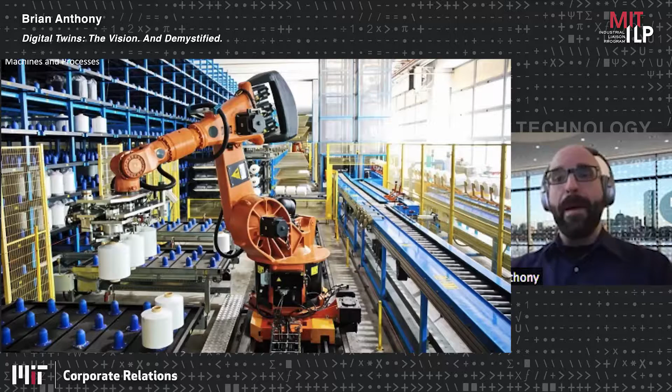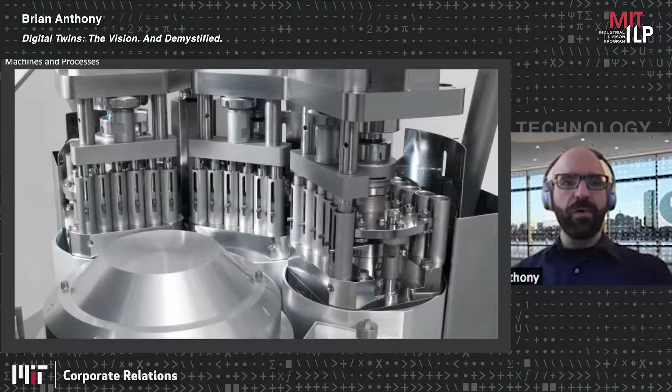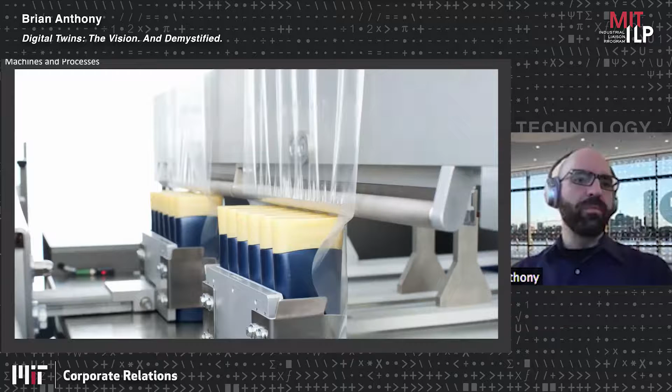It could be more complex, it could be a machine or a process. So a digital twin could be something that we want to emulate and mimic, be a twin of our product or our process, our machine, here a robot, or a coffee roasting machine, or a stitching machine for sewing together, putting the tag on a tea bag, or for compacting of pills for a pharmaceutical blister pack, or then packaging of those pills, or wrapping the deodorants or water in the plastic film before it's shipped, or filling of bottles, or extruding of fiber, knitting fiber together, or sewing fiber.

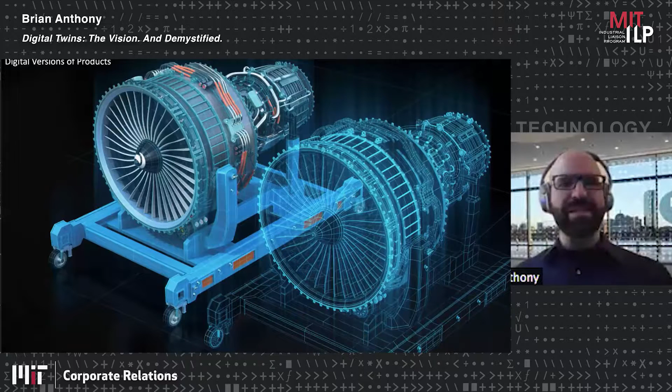Now, if you Google digital twin, you'll find a large number of phenomenal images that try to give this perspective of what a twin is. And you may find things that look like turbines and jet engines, the digital version of the product, where on one side you have the real product, and the other side you have this matrix-like graphical representation. You'll see that for turbines, or automobiles, or aircraft, wind turbines, or inside the factory, machines and processes.

So that was a rapid fire. Here are all these things that are physical that we could think about having a twin for.

Now, my first poll, just to get the audience participation going. I'm interested, from your perspective, you're interested in digital twins of what? Of products, of processes, of machines, sensors, control systems, production lines, factory, supply chains. Pick as many as you would like.

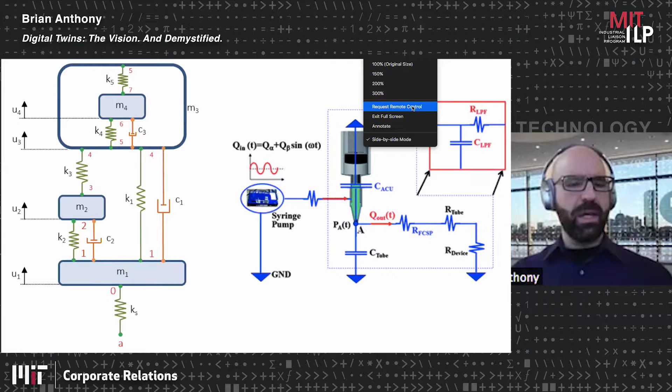Maybe back in your engineering or undergraduate days, you remember developing free body diagrams, and lumped parameter modeling is a digital twin. I have masses, springs, and dampers, and I can connect them together to develop an equation that describes how these things relate. Or I can look at a fluid system and develop a lumped parameter model that has resistance of flow through a pipe and capacitance of fluid being stored in the pipe. So these are digital twins, the modeling tools you use to develop a physics-based, white box model of some process.

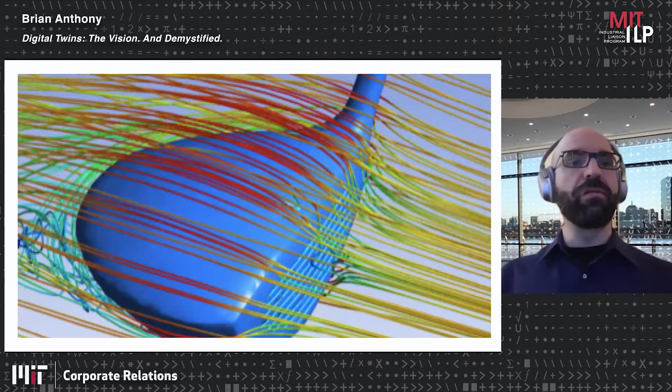If we increase the complexity a bit, we can use a tool like finite element models, which are really just a bunch of small springs and masses together to simulate where stresses and strains are happening in a complex product. Or, adding an additional level of complexity, computational fluid dynamics that models airflow around the head of a golf club, or fluid flow inside the mixing of a complex chemical reaction. Those are physics-based, definitely pointing to the white box digital twin model.

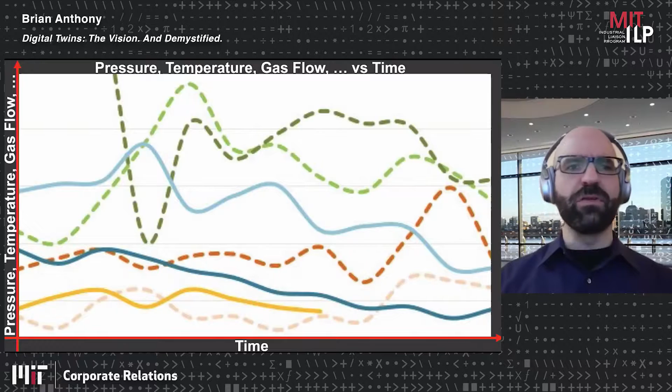When we talk about data, there's production data, time series data versus pressure, temperature, gas flow versus time, or velocity and forces versus time, or run charts where we have a process roughly in statistical process control, and we're seeing how it's deviating with respect to the mean.

Data also includes event logs or maintenance logs, when equipment is down and when equipment is up. Data also includes sensors, cameras, the ability to get thermal imagery of molten steel or molten aluminum, or optical imagery of circuit boards or food products.

So let's test your knowledge so far, or start at the high level. Let's start at the factory. How do we develop a digital twin of the factory? I may call a company and say, hey, I need help making a digital twin.

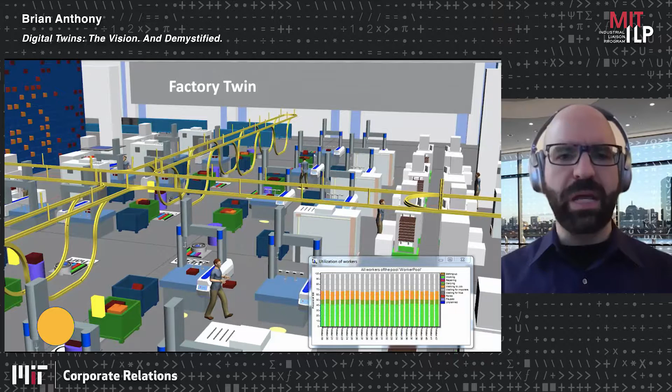And I want this graphical representation of my factory, and I want to be able to simulate what's going on. If I peel back the beautiful graphics of this tool, and we'll see some commercial examples here in a moment, what is a factory simulator? The building block, at least at some level that we'll talk about, is an unreliable machine.

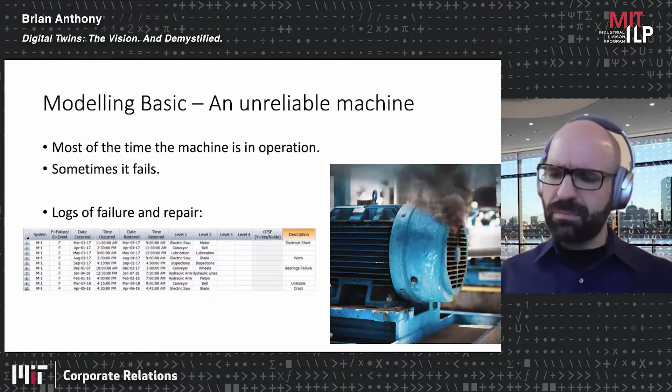Every machine, your car, a turbine, a generator, is going to operate for some period of time. It will fail at some point. And we will model this unreliable machine with nothing more than a coin flip. Actually, two coins. We're going to model this machine that sometimes goes down by saying, most of the time it's up, it's up, it's up. So I want to flip a biased coin that for most of the time stays heads. But once in a while, it's going to fail.

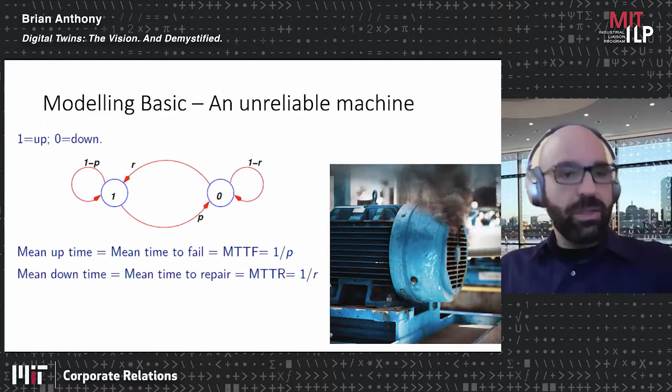And a way that I represent this is this thing called a Markov model, Markov chain when we sequence it together. My machine in this case, and I have many machines in my factory, can be modeled as two states. It can be up or it can be down. And it has some probability of staying up and some probability of going down. And then once it's down, there's going to be a time and a duration associated with repairing it to get it back into its good state.

Now we can model that. The digital twin, the underpinning to that, is this coin. Take a coin out of your pocket, has to be something other than a Bitcoin, bend it, meaning bias it, so that when you flip it a bunch of times, it has the same failure rate as what you observed from your factory floor, where I have this machine that if I look at many instances of time over days and months and years, sometimes it goes down. Let's bias the coin so that I could just flip it, and once in a rare moon, the coin is going to fail. It's going to come up tails. And I'll have a different coin for how long, the rate with which that machine can be repaired.

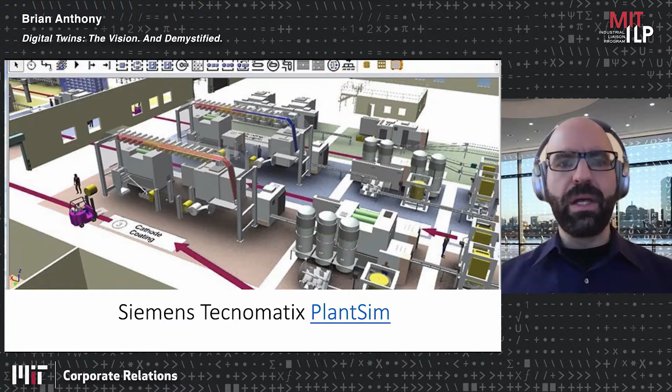Now, all I'm going to do in looking at these various commercial tools is I'm going to simulate my factory by flipping that coin, or bunches of coins, for every machine. And I'm going to keep track when a machine is up. If it's up and operable, material can flow through it. So I'll let material go through. And then I put a glossy, beautiful graphical display on top of it. And I get products called like FlexSim or Factory IO or Siemens Tecnomatix. But that's the graphical layer on top of just this fundamental ability to flip coins.

And what we can do with that coin flipping is we can model a simple production line that has two machines and a buffer between, model each machine with coin flips, keep track of when your coins are up or coins are down, when things are operating, material is flowing through, and I have real production at that instance in time. If one machine is down, I may get an increase in the buffer size between.

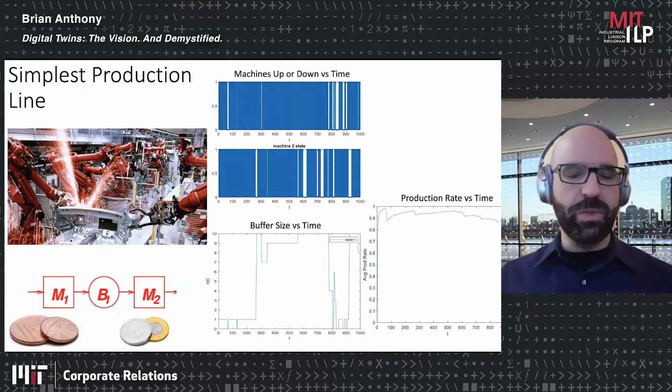And it doesn't just stop with one or two machines. I can do this for many machines. I can use this factory simulation notion to figure out different reconfigurations of a factory and what are the impacts of different buffer sizes, or how big should my buffer be.

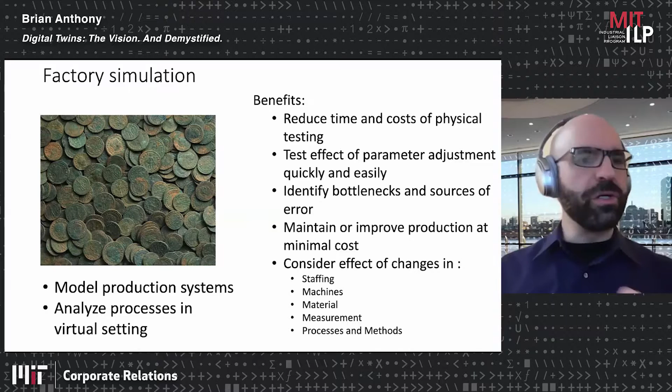So a factory simulator in this way, it can model production systems, provides this ability to predict what's going to happen with a new layout, consider changes to staffing, to machines, to materials, but building on top of this notion of a biased coin.

So in this way, my next question: factory simulation, what type of model is it? Is it a black box model, a gray box model, or a white box model? Are we building on underlying physics? Or do we know nothing about the process? Or is it someplace in between?

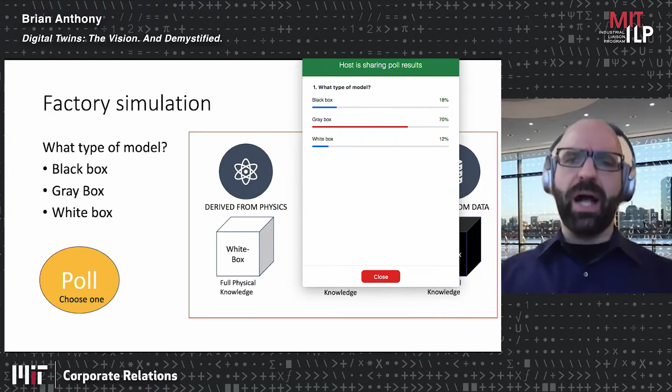Okay, so if we can pull up. So gray box. Very few people voted for black box, very few for white box, gray box. I agree. So why is it a gray box and not a black box or a white box?

So white box, we're not building on fundamental underlying physics, but we are building on the fundamental principle of variability and variation and randomness. So we know there's randomness, we're abstracting away. We capture some aspects of physics, of some real underlying process, meaning randomness. And we simulate, we run, we flip all these different coins, and we bias those coins based on the data that we have for real machines and real equipment that allow us to perform what-if examples and what-if case studies.

So let's switch paths for just a little bit. That was at the factory scale. Let's use fiber production through a number of different case studies of digital twinning for both materials processing and fiber extrusion.

So the digital twins that we're going to consider are going to allow us to look at some very novel ways to make fiber. That fiber can be fiber that we're putting into our apparel, or fiber that we're embedding into composites. What we're going to consider are optical fibers that are extruding through a draw tower of the type you'd find for optical fiber production, or polymer fibers.

And we want to do two things, as we'll see. We want to control the diameter of the fiber, but we don't want to just have a uniform diameter. We want to potentially modulate the fiber, and that gives some interesting properties both optically and physically. And then we also want to embed things, filler materials, inside of the fiber.

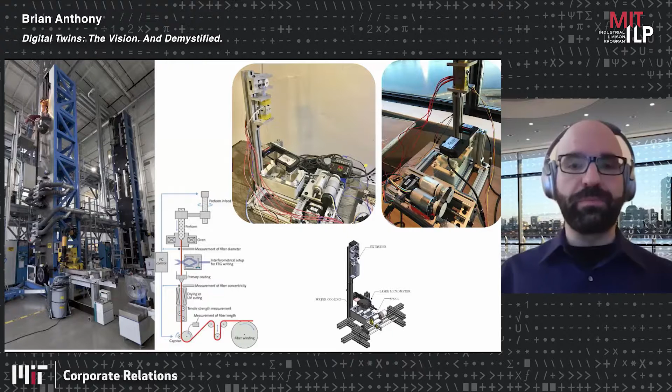The machines we're talking about are everything from a large draw tower, this is a three-story optical fiber draw tower, to a tabletop polymer extrusion system. In both of these cases, what we want to do is control the dimension of the product. For an optical fiber, we want it to be uniform and continuous. For some of the novel apparel fibers, we want to modulate the fiber diameter.

And the reason that's interesting is if we have a polymer fiber that we use to then knit or weave our clothing, and we have these sort of nodules along the length, when we knit or weave them, the fiber, with respect to fibers that cross it, will still roll as it always has, but it won't slide. The knobs on the modulation will stick, so you can induce very interesting properties in materials made out of modulated fibers. But we also want to embed technology into the fiber, to organize materials that have optical properties, electrical properties, or strength-bearing properties.

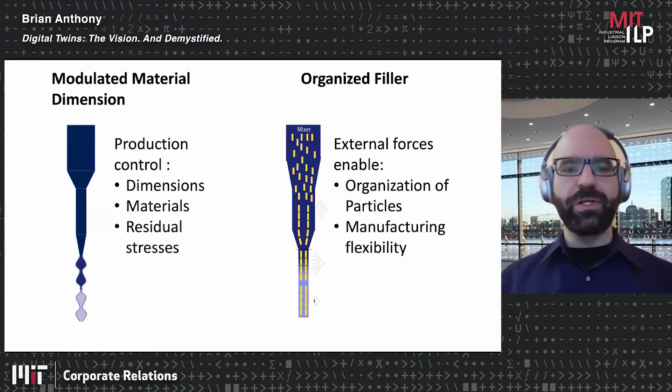Now, the system we'll start with is this little tabletop fiber extrusion system. It sits about half a meter high. It looks just like an optical fiber system. It has a heating chamber to melt the polymer, a cooling tank, and a spooling motor to pull it all through.

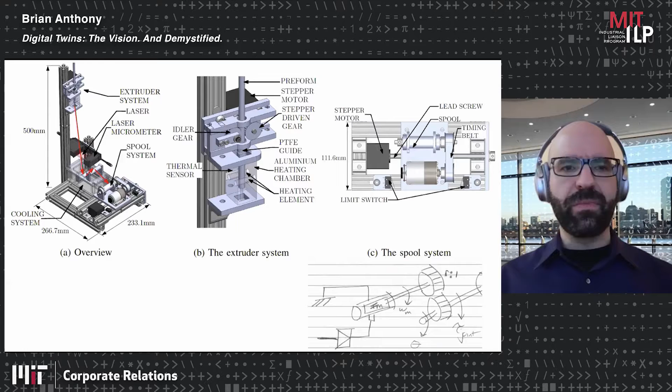Now we could start with developing a digital twin for this. We could write down the equations of motion for all the various components, and develop a set of differential equations that we could then simulate in time to predict how this machine is going to respond.

If I want to change the set point from a fiber diameter of 100 microns to 200 microns, I may get some overshoot, and that can be modeled by this differential equation through a physics-based analysis and lumped parameter modeling. If I do that, I can already reveal the fact that this fiber extrusion system is not symmetric. It's easier to go from a thick diameter to a thin diameter because I can suddenly pull faster, and it takes more time to go from a thin diameter up to a thick diameter. So we have different properties, and that's relatively easy to model.

But that's a white box model. What are the problems with the model? From your perspective, is it only captures the simple physics? It doesn't account for the part where we have to redo for different set points. It misses random variation. Or, hey, there's nothing wrong with the model, it's perfect, it'll work.

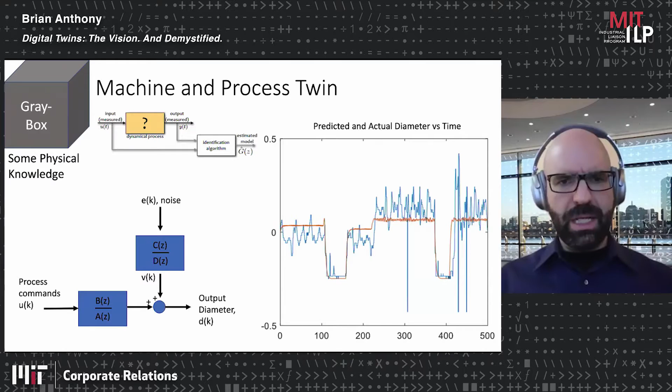Now let's continue to talk about the fiber for a moment, but in a slightly different context. So these next several slides are taking that concept of model fitting and amping it up a little bit, where maybe I don't have historical production data where I can just collect all the data, stop, analyze it, and develop the model. Maybe my system is continuously varying.

I want to simultaneously take the inputs and outputs I'm getting from my system, but to add a level of complexity, I can also control what I want my machine to do. If I'm trying to develop a model that says here's the inputs, here's the outputs, what's the best thing that allows those to be predicted from one another? If I also have a lever to reach into the system, I'm going to use my least squares techniques on steroids, but also do real-time experiments. I'm going to look at the uncertainty associated with how well my model is predicting what I'm measuring, getting this data in real time.

And I can change my system. I can say let's go to a new set point, or try slight deviations around how it's currently performing. So I can do real-time experiments. I don't just have to live with the data I was given from history. I now do this very complex process that looks like line fitting, where I am actively and in real time doing slight perturbations to get more data, better data. Under the hood it's sort of line fitting, model fitting, finding coefficients, but where I have the ability to do those real-time experiments.

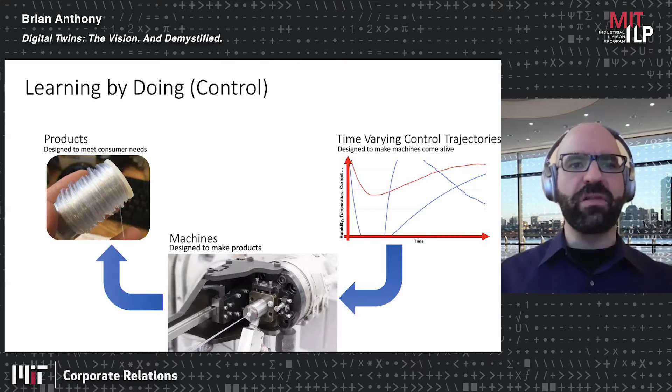We've applied this to things like learning the optimal controller for how to make optical fiber or polymer fiber, where we have control signals going into the machine that produces the fiber. We measure the output properties of the fiber, we measure the input properties of the fiber, and we feed it into this neural net, a bunch of parameters we're trying to find that map the inputs to the outputs.

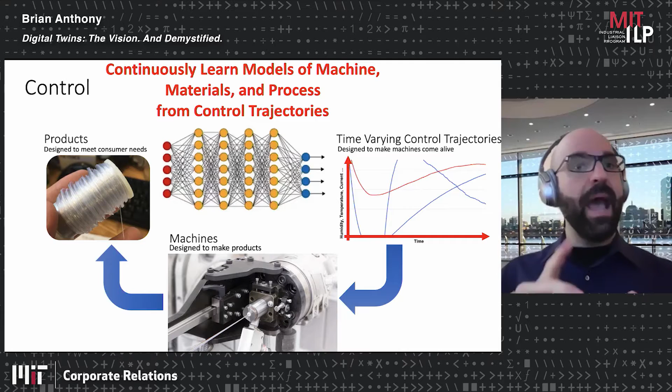But we add this layer of actively saying, let's actually change our new set point, let's change what our next set of inputs will be. In this way, we're able to continuously and more dynamically learn not the underlying physics, but at least a representation of the physics captured through a set of parameters in this complex network of neurons that captures the model of the machine, the model of the materials, and the model of controlled trajectories. We then use that to predict and improve our controller.

I'll skip through this slide. I should have had a gray cloud here, but this is really baking and borrowing and stealing from the areas of reinforcement learning, where I have an agent, in this case the physical machine, interacting with the world, and I'm actively and dynamically modifying the world to get more data to learn about the physics of the underlying process. So I ignore the detail behind the cloud. It's input data, output data, but I'm constantly adjusting those to get the best model parameters that I can, and I know the uncertainties associated with things, so I can tell the machine to behave in different ways.

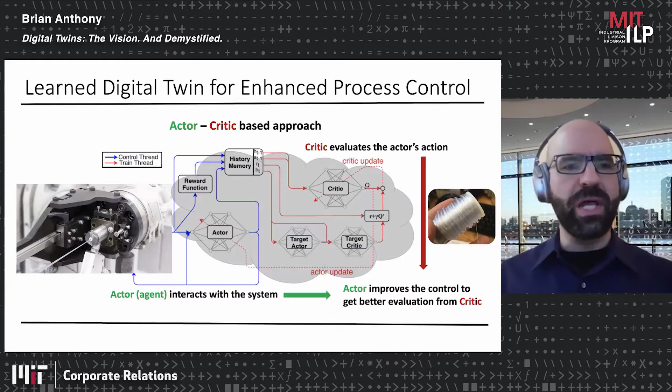We can pull the fiber faster, or we can push it, and each of those are going to change how material is flowing through. So we've learned in some integrated way in this complex network of weighted coefficients how to sometimes pull the fiber faster, slow down, but at the same time change how we're pushing the input material into the back end of the fiber extrusion system. So this is straight up a black box. We didn't really worry about the physical knowledge other than how to develop a control system.

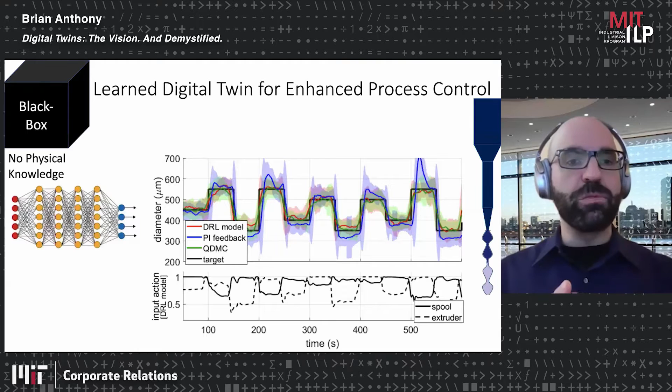But we constantly are adjusting the set points of our system. It can be small changes or sort of big changes to make sure that we've interrogated a wide space of the physical range of how this machine operates so we can learn a data-informed, black box model.

Something that's often a question here is how we use video in a manufacturing environment. And this takes you away from fiber for a moment, and is a very data-centric view of creating digital twins.

So let's look at a couple of processes. Here is a laser weld melt pool, and we would like to have a model for this process that relates the temperature or the heat going in from laser pulses and how this material is splattering.

Or we would like to have a digital model for laser cutting of aluminum, and we would like to try to understand how to control the cut rate and the power rate to not have too much splatter. Or we would like to look at a wire-fed plasma welding process.

Again, we have this image data, and we want to use this image data to inform the development of a model to explain our process. We looked at a stitching operation previously. Now here's a binding operation.

Now the one example here that I'll use for a couple of slides is a diaper packaging line. And we'll notice here the diaper flowing through the line, and there'll be a little bobble at some point. And that bobble will keep going through, and at some point the system will completely jam.

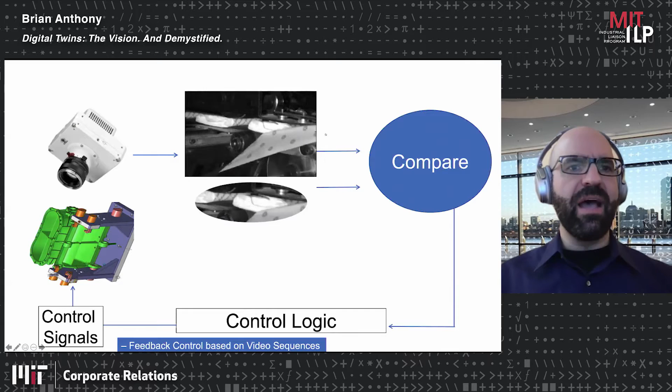And we developed algorithms that allow you to do that video comparison in real time, where real time is thousands of frames per second. And this is what the overall framework looks like. I have my model, I have my new data coming in, I do a real-time comparison, which is a bit more complex now than just line fitting.

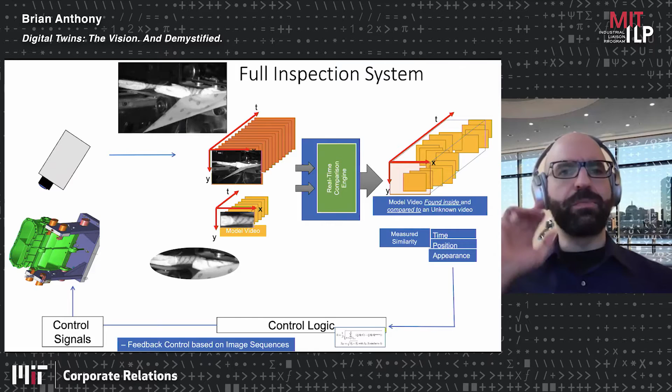What I'm doing is finding this time-space path of our model through my new incoming data. That time-space path tells me something about the spatial similarity, temporal similarity, or overall trajectory similarity. And the only reason I can do this, when I'm taking a high-speed camera that's spewing data at me at gigabytes, 10s, 20s, 30s of gigabytes per second, is because I have the sensor that allows me to do that.

And I have the benefit of video gaming GPUs that allow me to massively parallelize the processing of my video streams. I take my model and process it, comparing it to my new incoming streams. In the end, I extract my model comparison from that model, extracting parameters that say something about spatial similarity, temporal similarity, and I can map out as a run chart the difference between my model and new incoming data.

What we're seeing here, the big thing to point out, is where we had that little bobble in the video. If it came through at cycle N, that bobble was detected through a real-time comparison of my model to my new incoming data. And I can stop the machine before I get out here to the later cycle where things are completely jammed and stopped. Okay, so let me go to my few wrap-up slides here.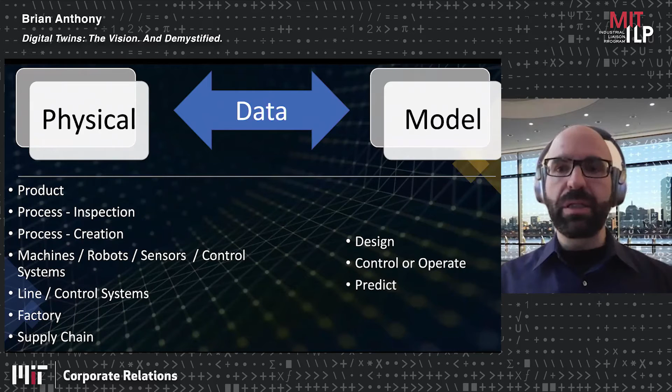What I wanted to convey today is that digital twins, there's nothing magical about this notion of a digital twin. It's a model that can be informed by physics, informed by data. You can develop models for products, for processes, for machines, for factories, and use them to design, to control, and predict. The real holy grail, one of the big opportunities, certainly in this COVID era but just in general, is how do we use them in an integrated fashion?

If we take all of these digital models together—models of process, models of factory flow, models of supply chains going up and down—and incorporate them, that's not a solved and done problem. But if we're able to tie them together at various scales—and there are certainly commercial attempts to start to do this—having a full, from low resolution to high resolution, small time to big time, virtual representation of my entire process could potentially allow me to do virtual commissioning.

That could allow me, in this era of needing a lot more masks, N95 masks say, to say hey, I want to develop a new mask line. I have all the data from an existing line—how do I go about making it faster or easier to build a new line to meet the demand, for example, for personal protective gear?